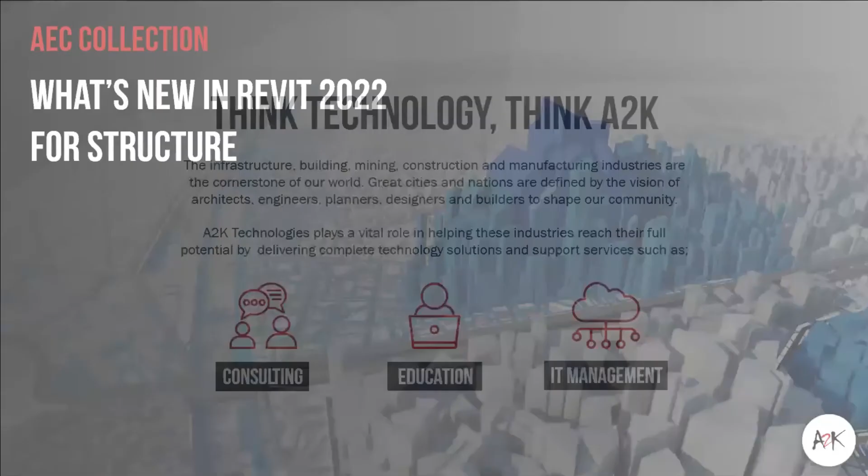Thanks for joining us for today's webinar, Revit Series 3, What's New in Revit 2022 Structure. Technical consultant Ben Burns will be presenting for us today.

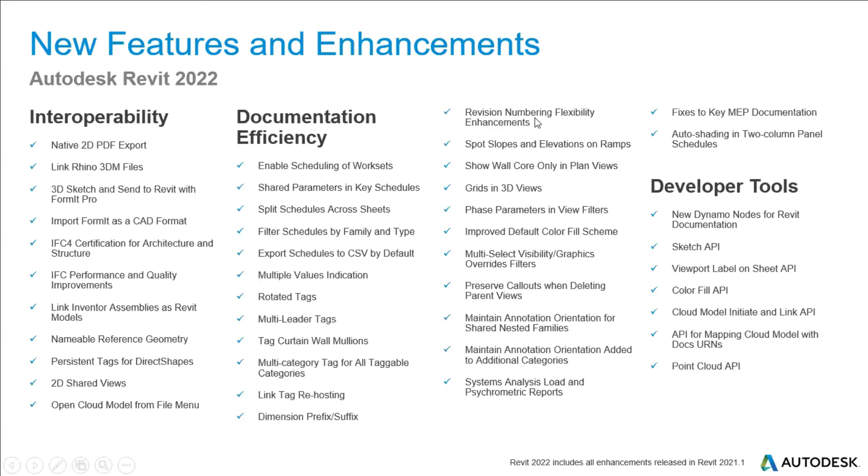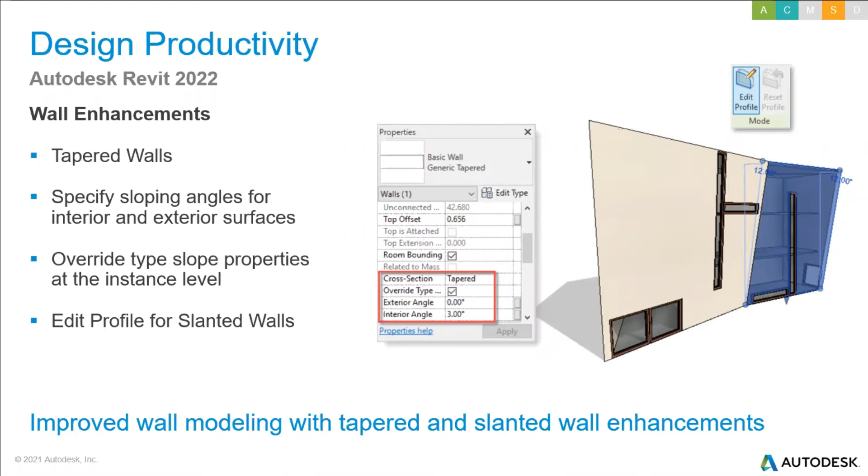So we'll go through some of them in more detail now. Design productivity - we've got wall enhancements. Now we can change any wall to a tapered representation. We can change that cross-section parameter to tapered and update those sloping angles using instance overrides or the wall's temporary dimensions. We can align hosted components to the sloped face of the wall, so windows etc. align to those faces and you get clean joins. You can modify the sketch boundaries of a slanted wall along the work plane, giving greater control over the display of the wall geometry.

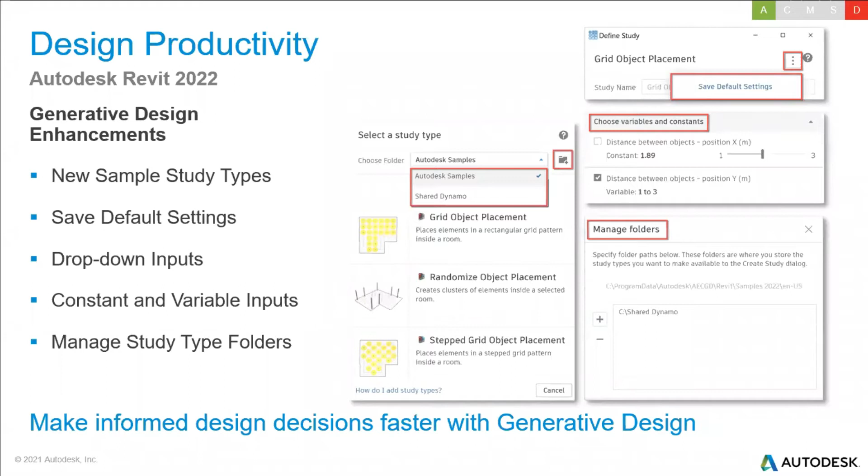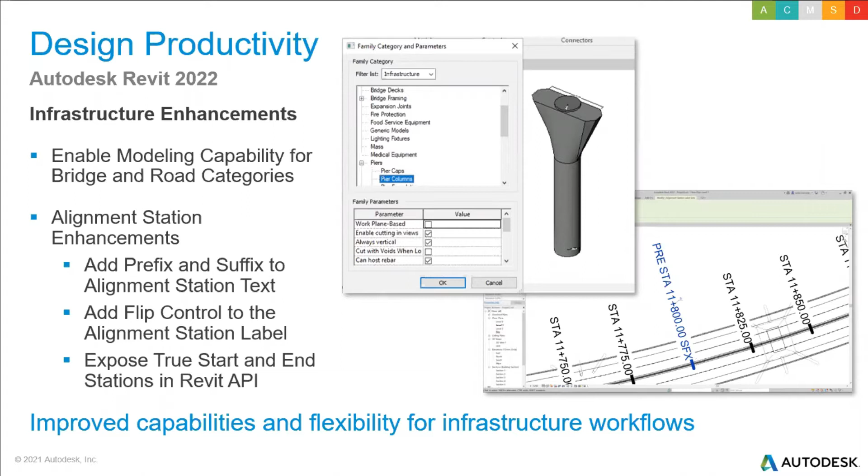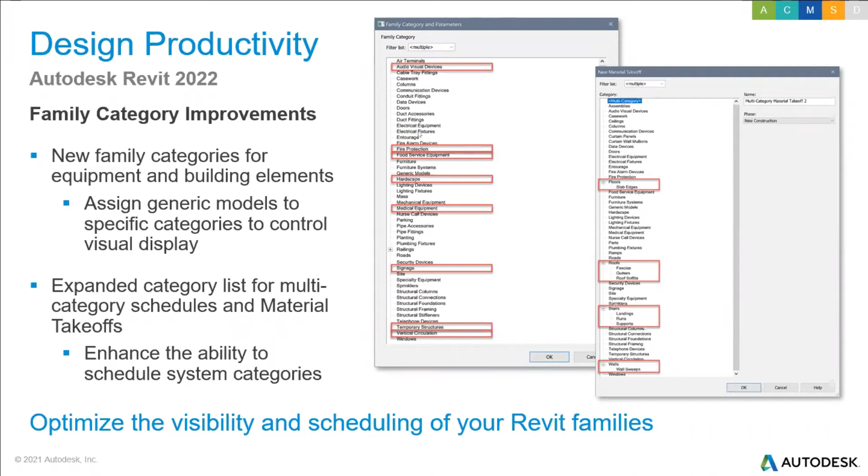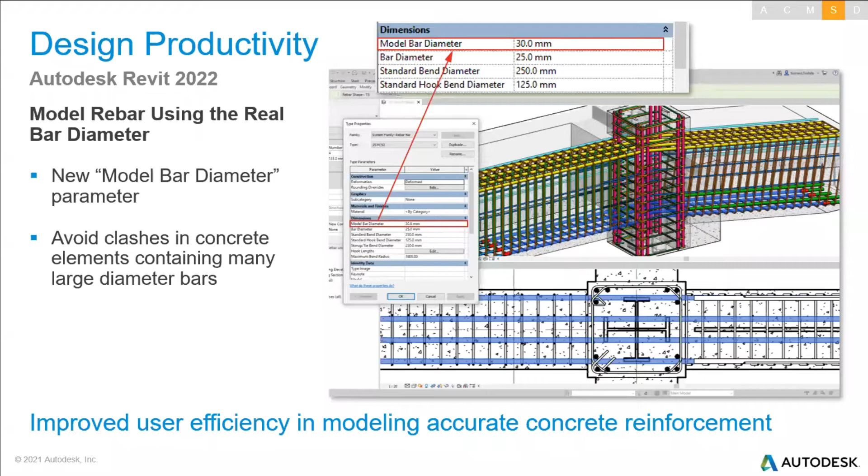Revit 2022 does improve your rebar modeling and detailing. It makes it a lot easier for you to move from those disconnected CAD workflows to BIM, really improving that 3D reinforcement modeling feature. You can now move or remove individual bars in those rebar sets and path and area reinforcement to avoid those clashes with other bars.

So you can displace locally bars and still maintain that logic of the set, like your 200 diameter centers or whatever. There's no need to split a set into multiple sets or remove the path and area systems. It was a bit complex trying to do that before, but now you can edit them at the same time.

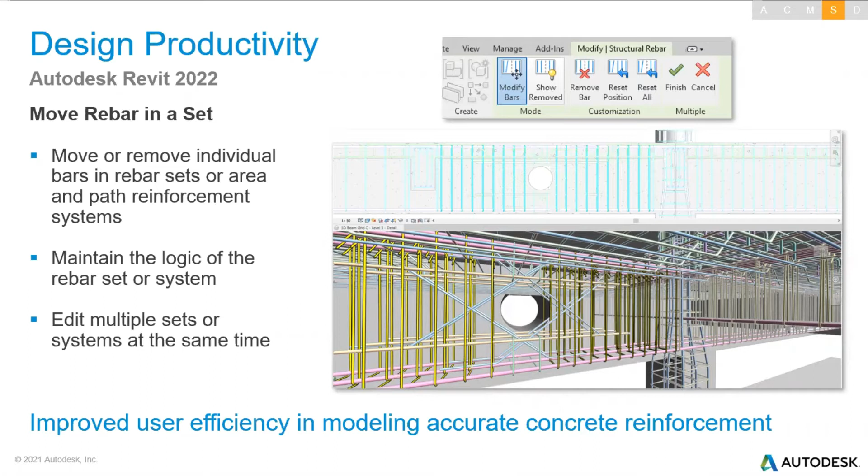This new feature significantly improves your efficiency and productivity in modeling that accurate reinforcement, particularly in both cast in place and precast concrete structures.

You can place rebars of exact dimensions now, aligned to any reference, with just 2 clicks. They've really improved how the reinforcement places. It's a game changer basically for rebar detailing in Revit, making it a lot easier than before. I think a few people always found it a little bit clunky, but now it just works a lot smoother and it's a lot more approachable, especially for people who don't use it a lot.

Yeah, really improves that ease of use and your own productivity in modeling those reinforced concrete details.

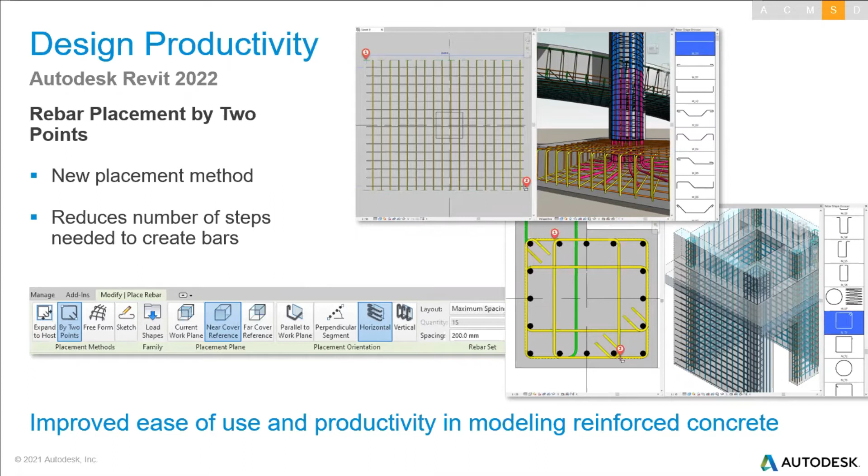You can assign shape codes to custom bent freeform bars, so it provides you better fabrication instructions. You can distinguish between bars to be bent on site versus bars bent in the shop, and manually assign the desired shape code to bars. It just leads to a lot more accurate rebar bending schedules and bending instructions and the like.

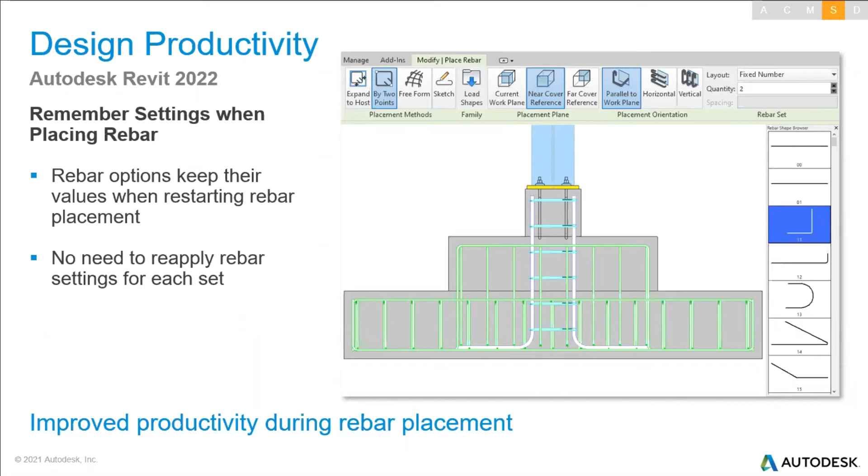Settings used during rebar placement are now maintained for the duration of your Revit session, so there's no need to apply rebar settings for each set. Your layout, placement plane, placement orientation, rebar shape, and rebar type keep their values when restarting rebar placement. This works for both shape-driven and freeform rebar, reducing the time spent having to monitor and manage your rebar settings.

An added bonus for 2022 is the improved performance in 2D views when zooming, panning, and when the regen's happening. These performance improvements are noticeable mainly when displaying rebar in 2D views at a fine detail, particularly with complex drawings on screen. In testing, the regen times dropped from minutes to literally 3 or 4 seconds, so it's got a lot better rebar reinforcement performance than ever before.

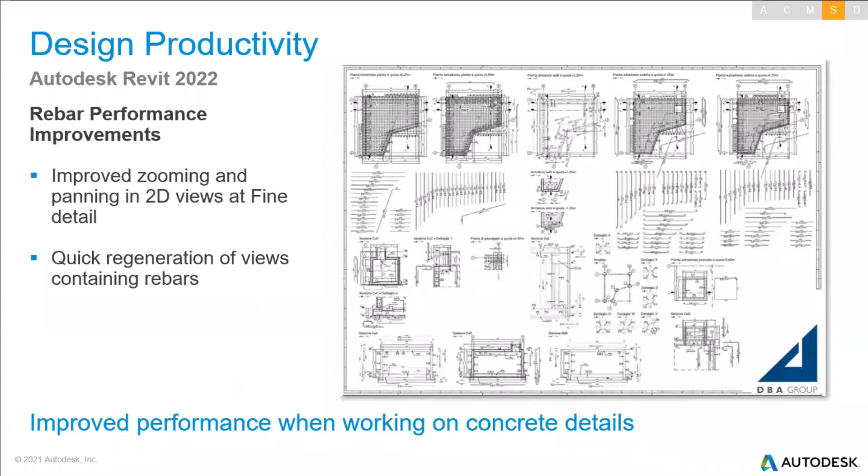In Revit 2022, structural engineers can automate the placement of steel connections, following custom sizing rules, by predefining connection libraries and associating those connection types with profile size ranges applicable to them. The first step is for you to create that library of your steel connections.

In that library, you can add a variety of connection types and specify the ranges where they'll be applicable, based on your own practice or standards like Australian standards. They're intended to help you save time when placing those simple steel connections.

So you can have a certain base plate that you use for any SHS from like 100 to 200 - probably a bad example, but you know, you can have a whole bunch of 200 or 250 UBs. Anything that's a UB within 200 to 280 height, you can use a particular base plate for.

That really enhances things, as you can use that in Dynamo to automate those connections. Once you've configured that library, you can open the project and use Dynamo Player to place those steel connections automatically. Works well for all your connections like single plate connections, end plates, cleats, base plates, column splices, etc. Anything that's typically pre-designed and standardized, you can place faster and more accurately.

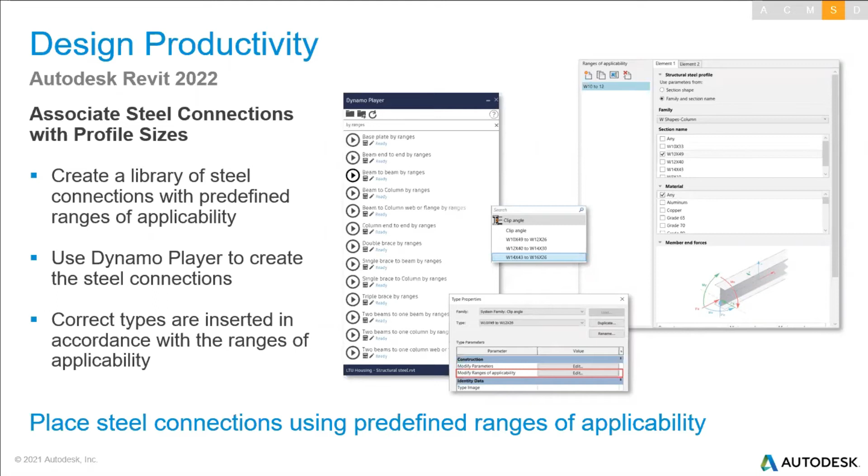Another new feature in Revit 2022 is category list sorting improvement, now consistent with alphabetical sorting order. I think a lot of people who deal with schedules will appreciate the alphabetical ordering for properties, making it a lot easier to sort categories in your schedules and material takeoffs.

In Revit, you can use filters to quickly find available parameters now when creating schedules and working with those. When you create a schedule, the fields tab dialog includes a filter section, so you can filter these parameters based on parameter name, parameter type, discipline, value, type, or instance, and use that as a search tool - as you type the parameter name in the search field, the list is actively filtered.

When filtering a schedule, that filter only affects the available fields, and fields already selected for use are not affected by the filter. You can use that information to help identify the correct parameter to work with, along with tooltips that will show you the parameter name and parameter type.

It also appears in the project parameters dialog. So it really enables you to easily filter those types and characteristics, save you a bit of time, and help you manage them more accurately and efficiently.

The Load Autodesk Family opens a dialog that displays the default content provided by Autodesk. Some people have been using third-party products for this. There are a few that people know of, but I won't name them.

This content's now cloud-based. It used to be a technology preview - I think it was available a bit in 2021, but only as a preview. Now it's fully functional, so you can have your sequential searches, back, forward, home buttons, and navigate through all that content.

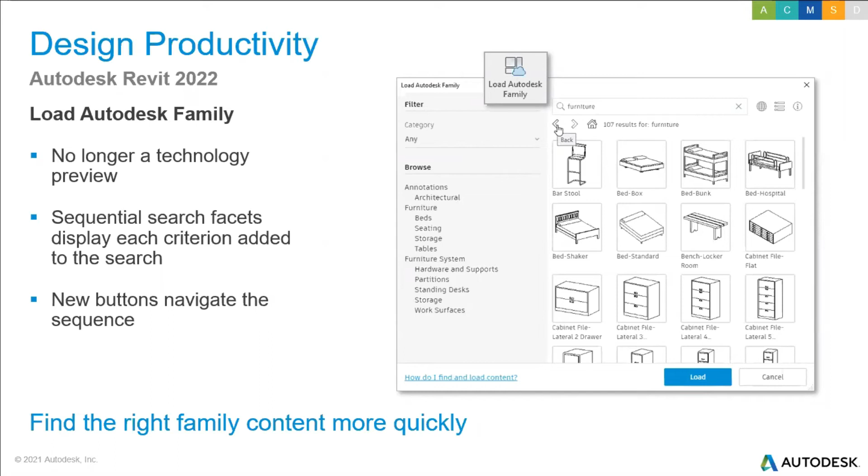In Revit 2022, settings in all modify tools are now remembered across your sessions for mirror, align, offset, scale, rotate, etc. The material browser will also remember the last used tab.

Your performance in loading cloud projects has also been improved by like 30 to 40%.

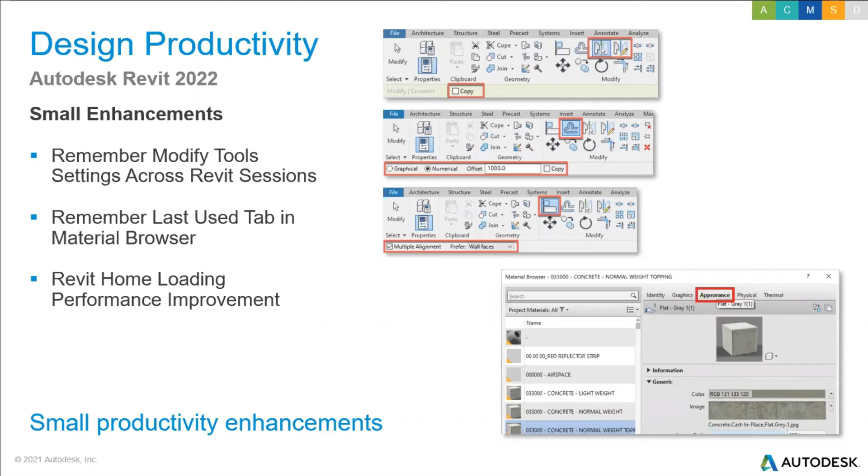In Revit 2022, many dialog boxes that were formerly fixed in size can now be resized. I know that's something a lot of people have been screaming for, so it makes it a lot easier to work with those long lists.

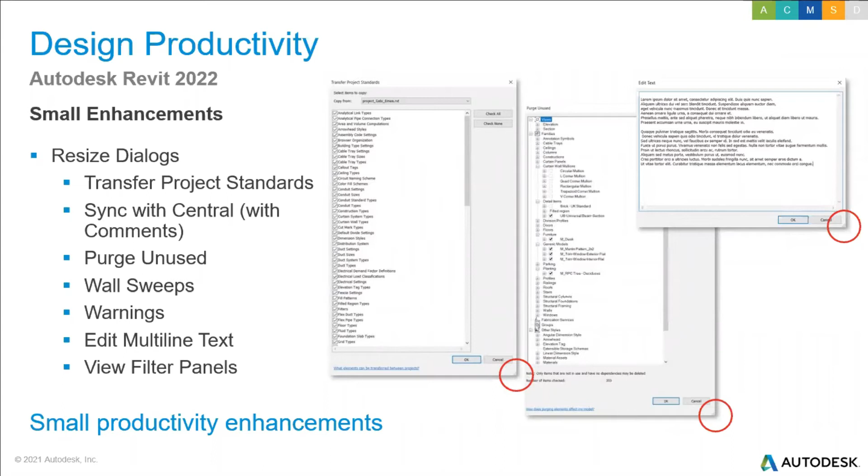Now we're going to talk about some interoperability features. For those interested, we're about halfway through the slideshow.

Revit 2022 includes its own PDF export. A lot of people I know use third-party ones, but this is an inbuilt native 2D PDF export. It's very similar to the print dialog, such as your ability to export the visible portion of a view or your user-defined selection of sheets.

PDF naming rules you can really set up within the export setup. Even with some of those third-party softwares, it pretty much just gives you the name of the file, whereas this you can really customize a bit - if you want to get the name in, the number, maybe put a prefix in as well, you can do that.

You can detect an automatic size, or select it from a multitude of sheets. Just makes it a lot more familiar to people, and it's also a lot easier to configure those features to really get out that content well.

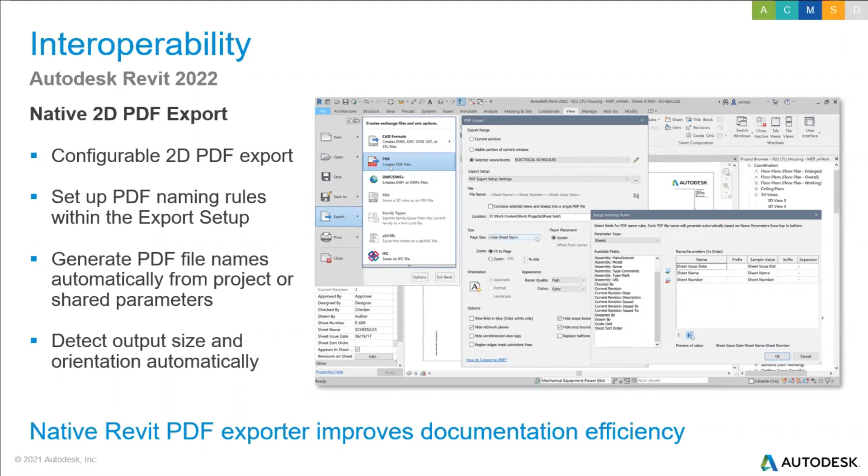Revit 2022 enables the linking of files from Rhinoceros. Changes in the Rhino file are immediately updated in Revit by reloading the link, so it acts like a live link - you will need to reload, but you do get that link through there. Host and link to your conceptual Rhino file in Autodesk Docs and ensure everyone's got access to that latest information.

Achieved IFC 4 reference view certification. IFC property set definitions and the like have been updated to the latest versions, significantly improving the performance of linking in some IFC files containing elements with large amounts of parameters. Added the ability for IFC exporter to pick up information from your site location, so geo coordinate referencing etc., as required by IFC. Autodesk is the first software vendor to support IFC 4 exports for both architecture and structure.

That has been an issue. I have had it with a couple of large architects trying to export to IFC 4, where now in 2022 it does have a better tie-in.

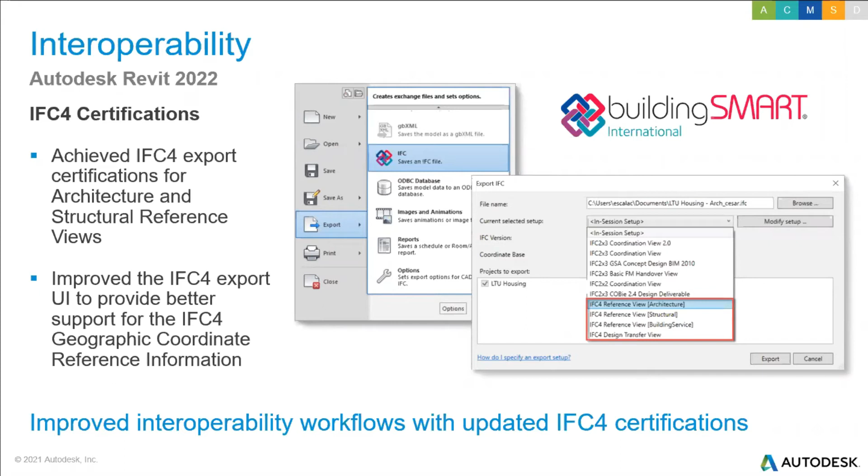Maintain links between your Revit and Inventor data for seamless BIM interoperability. You can link your Revit models exported from Inventor, and it has the new simplify command to basically produce a Revit model containing only the components and features needed for your design.

You can link those resulting Revit files into Revit projects, and link Revit back into Inventor, so the Inventor user references the Revit project - keeping that building design intent model synchronized with that manufacturing data.

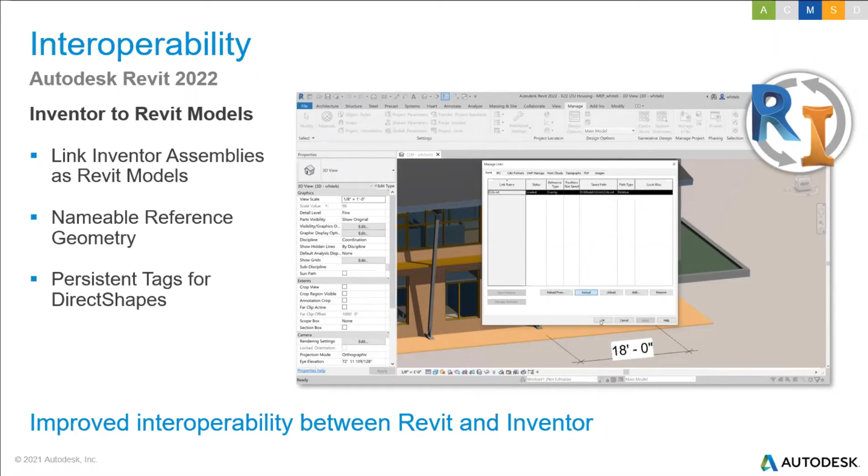It allows mechanical engineering tasks to be performed in the context of that building model, and when the manufacturing models are repositioned and sized correctly, it'll link through as native Revit data. So it's a big improvement in that interoperability between Revit and Inventor.

Revit 2021 introduced the shared views feature for 3D views. In Revit 2022, this feature has been enhanced to also include 2D views and sheets. So this means you now have the ability to share 2D and 3D views and even sheets of your Revit model with your project stakeholders who don't have access to the software.

From the Collaborate tab on the ribbon, you can select shared views to launch your shared view palette. When you're ready to share your content, just press the new shared view button, name the view, and press the share button, and you can then share that link with project stakeholders.

They'll have the ability to review, comment and mark up the shared 2D sheet using your Autodesk viewer on their web browser. Back in Revit, you can click the refresh button in the shared view palette at any time to review the latest comments and other information.

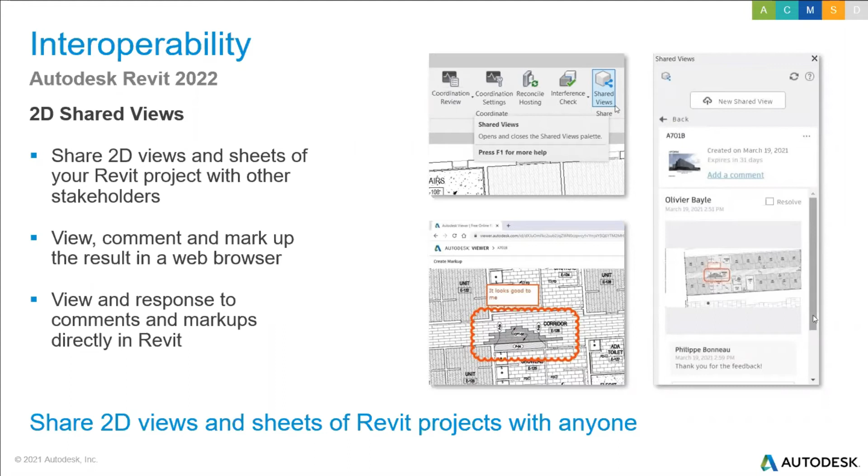So it really sort of helps with that paperless office, if anyone's in offices these days.

You can open the cloud model from the file menu. So in Revit 2022, when you navigate to file open, you can find a cloud model button to open that Revit cloud model, which provides another way to access those cloud-based models in addition to the home page.

Saving a Revit project as a cloud model and initiating a cloud work sharing display uses a similar user interface, which provides you with a better user experience.

And on the homepage as well, the button BIM 360, available in previous Revit releases, has now been replaced with a button Autodesk Docs to access projects stored on that platform.

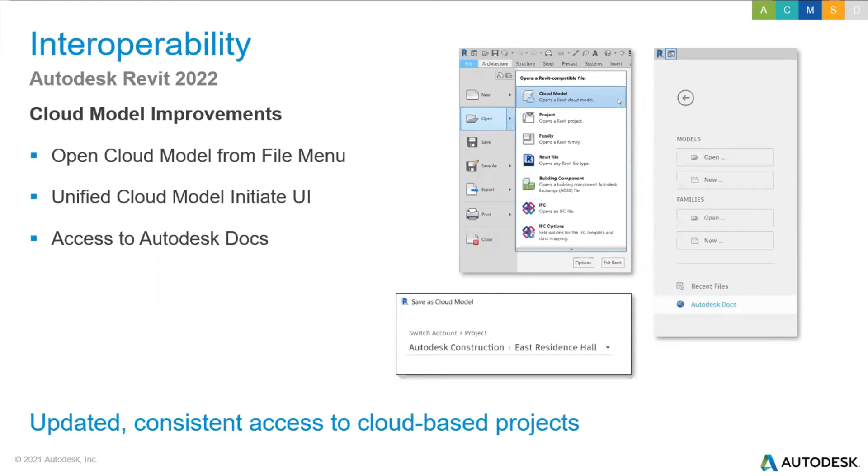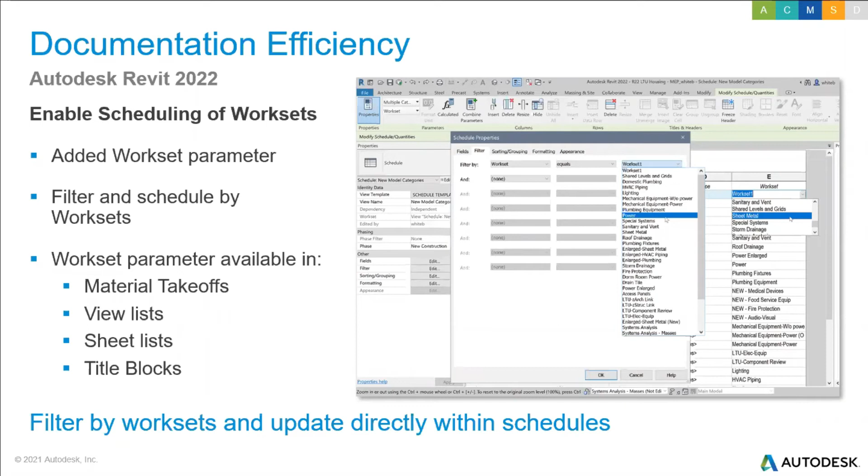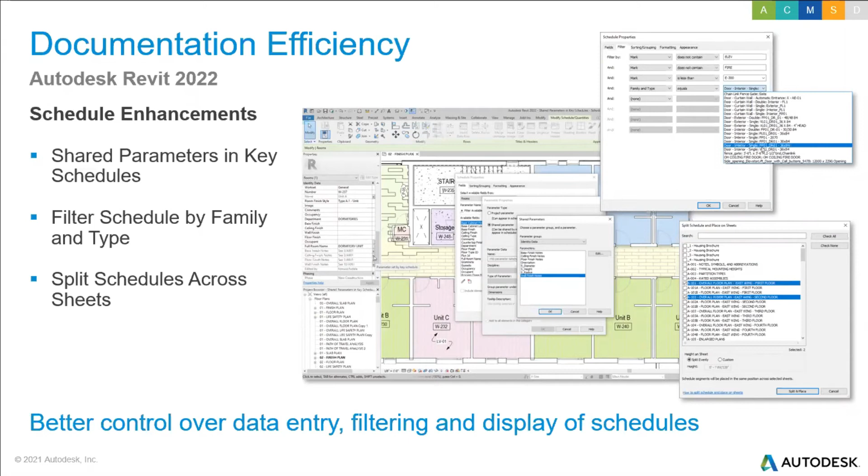Revit now supports the ability to export schedules as CSV files as well. So if you do add a schedule to a sheet, you can export it as a CSV format. When exporting a schedule, you can send the data to a CSV and get it out to Excel, where you can open and manipulate it.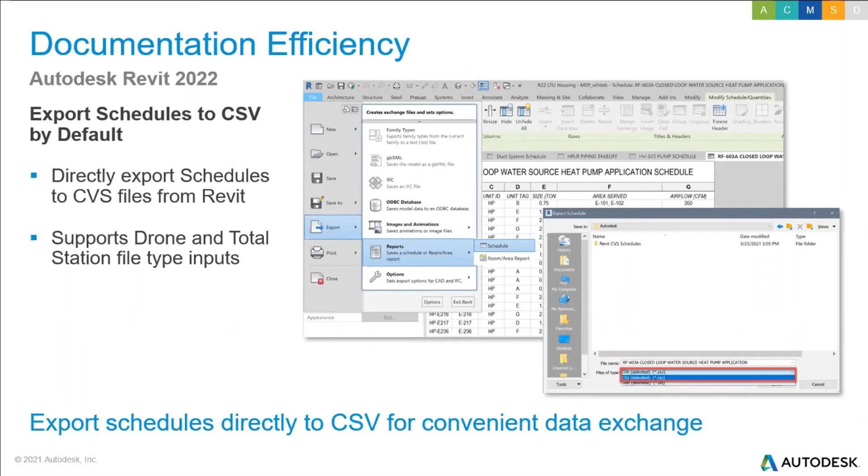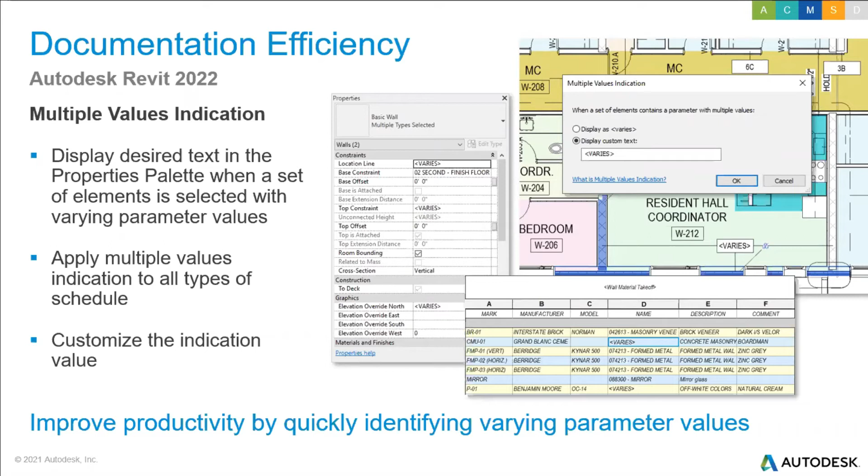Rotating tags. So when you rotate a tag in Revit, you might like to control that angle precisely. So you can now set in a new angle parameter for tags. It's found in the properties palette, and it makes it easier to control that displayed angle of that rotated tag. So if you rotate the tag with the rotate command, the angle value is automatically calculated, but you can enter a specific value. So it makes it easy to apply tags in your views, giving you a better control over it.

And if you have that, you can also have multi-leader tags. So if a view in your project contains similar elements, you may prefer that they share a tag. So you can apply a single tag to multiple elements and even indicate that total quantity if you desire. So once you place that tag in the model, you can add or remove leaders to similar host elements at any time. And you can just select the tag, and using the add and remove host option, you can add additional hosts.

Wall mullion tags. So a new category has been added for curtain wall mullions. So you can choose to load the tag for curtain wall mullions or create your own tag for that category. So these tag enhancements really add that flexibility and will help you create more readable and efficient annotations when documenting.

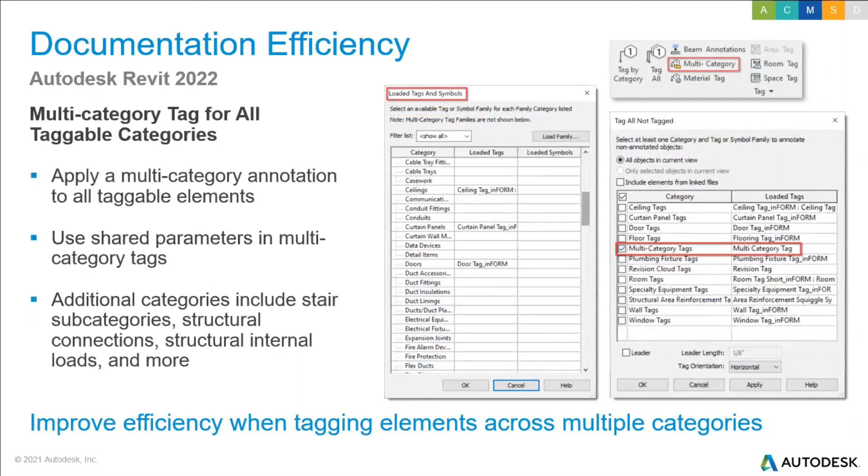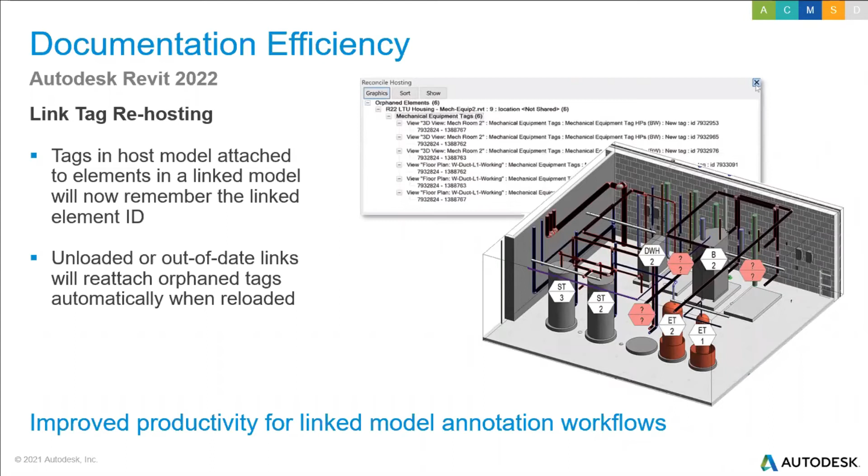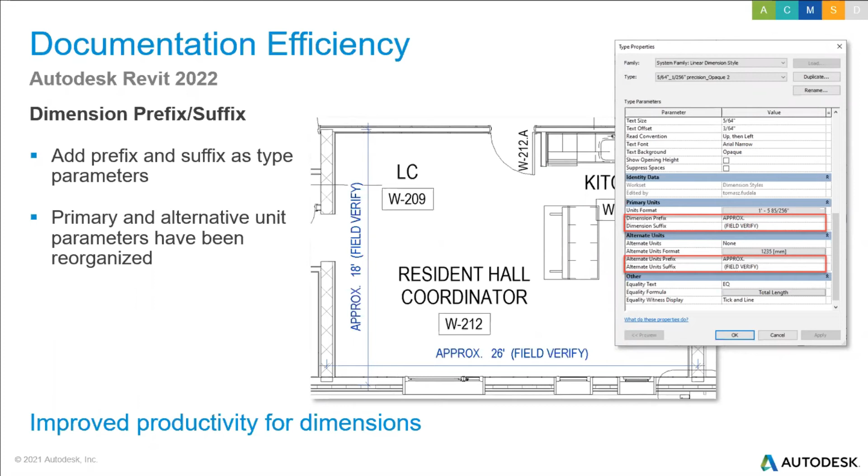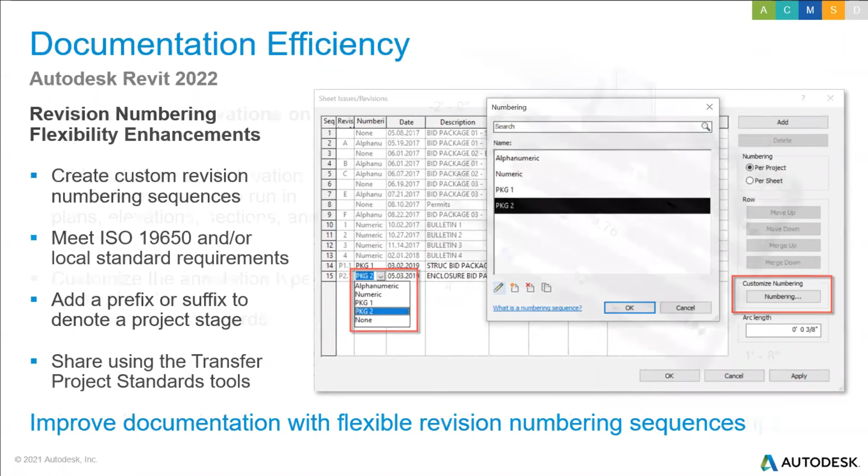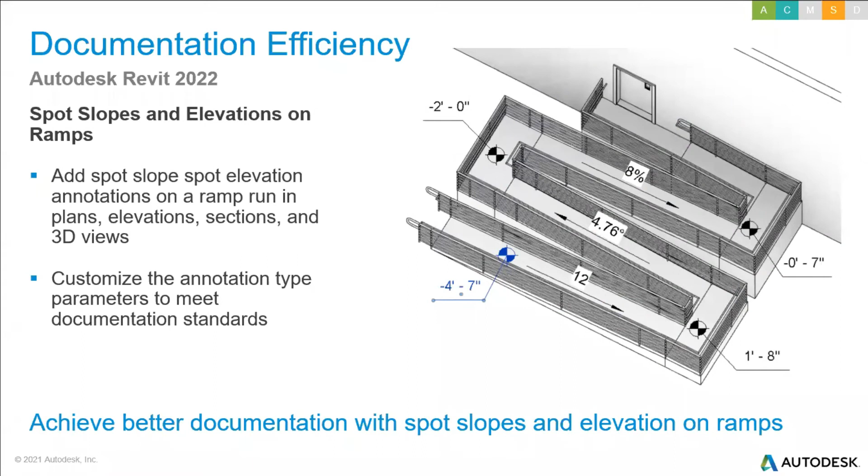In past releases, it was time consuming to hide the non-core wall layers. So you can hide or turn off the layers of core walls. So you've got now a parameter to help you display only those wall core layers. So it's in the visibility graphics dialog box. You can deselect the new non-core layers and it'll display a simplified version of those walls. So probably more of an architectural feature, but occasionally we do need to show those core walls, etc. So wall layers located between those core boundaries will remain visible. Makes it a lot easier to read plans in Revit.

In Revit 2022, you can choose to display grid lines in your 3D views. You can go to the Show Grids parameter in the Properties palette to access a list of levels that you want to select the grid lines to display for. When you hover over a grid, it'll highlight as a planar surface. If you select the grid, the controls will appear and its properties will display in the Properties palette.

In the 3D view, you can treat grids in many of the same ways as you do in a 2D view. So you can hide grids, you can display grids by halftone, you can copy, paste, or delete grids from the model. You can snap to grids when placing other elements. You can also change those grid instance and type properties.

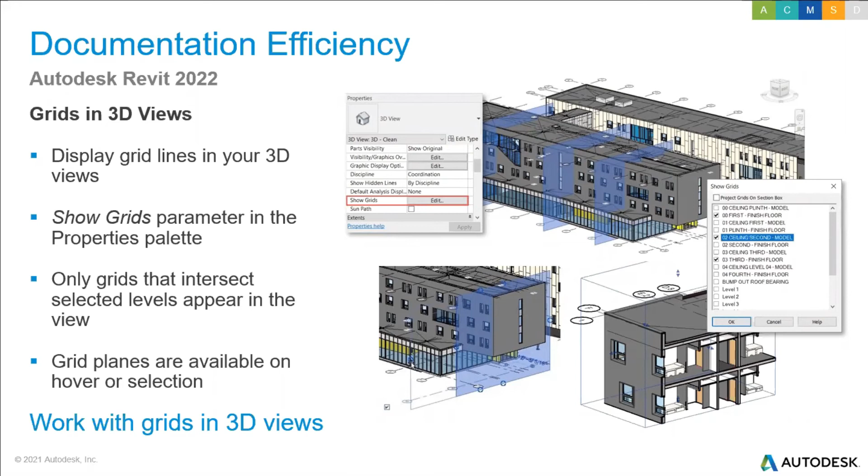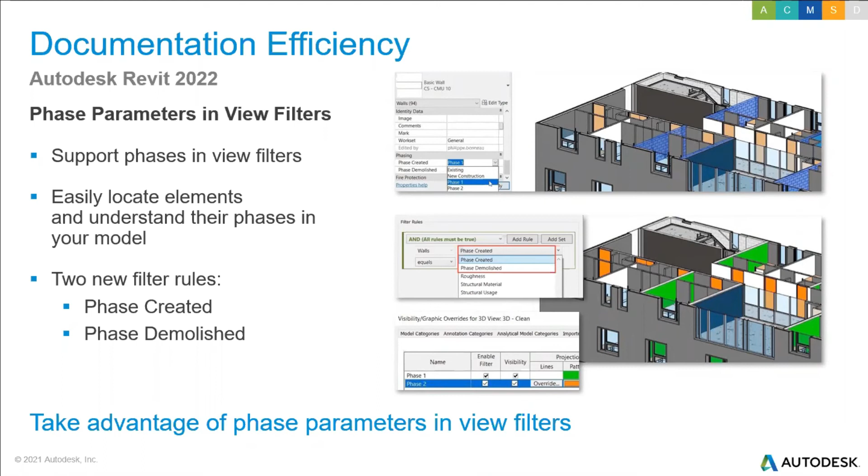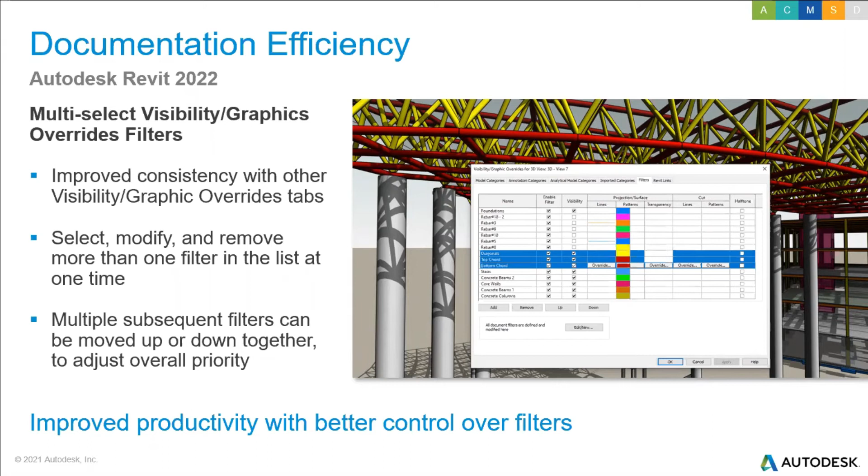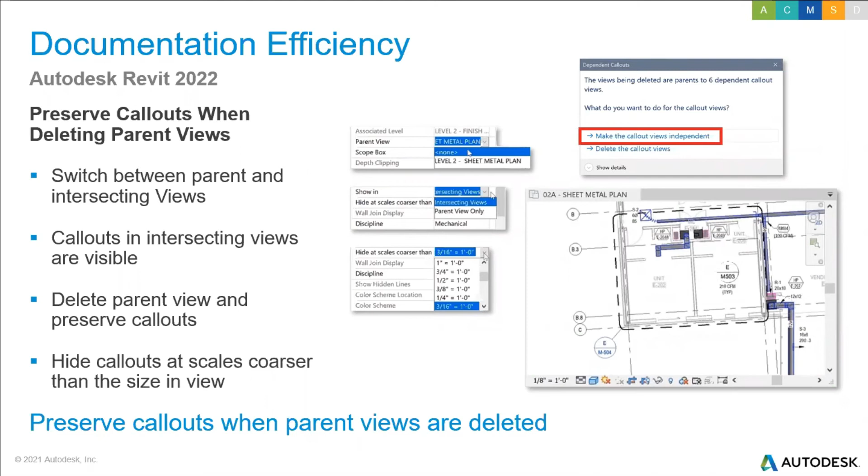Dependent callout views are preserved when the parent view is deleted. You are asked if you would like to make the callout view independent or delete the callout view. More categories can now be shown with an annotation symbol using the maintain annotation orientation family parameter. With this improvement, maintain annotation orientation has been added to the following categories: generic models, mechanical equipment, specialty equipment.

There are some developer tools, so we'll just touch on some of the Dynamo improvements. We've only got a couple of slides to go. In Revit 2022, 67 new Dynamo Revit nodes have been added to support the most commonly requested conditions for annotations, sheets, and views to automate those documentation tasks for higher efficiency. It also includes Dynamo for Revit 2.10. These nodes will help you work a lot more productively on your documentation through Dynamo.

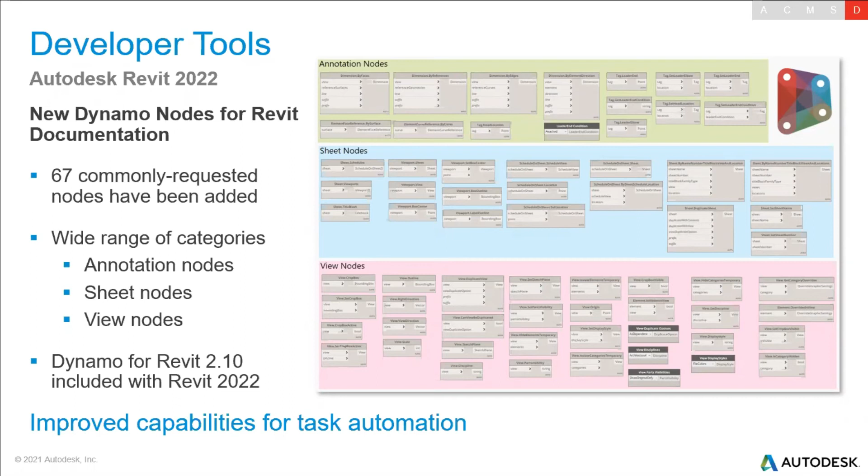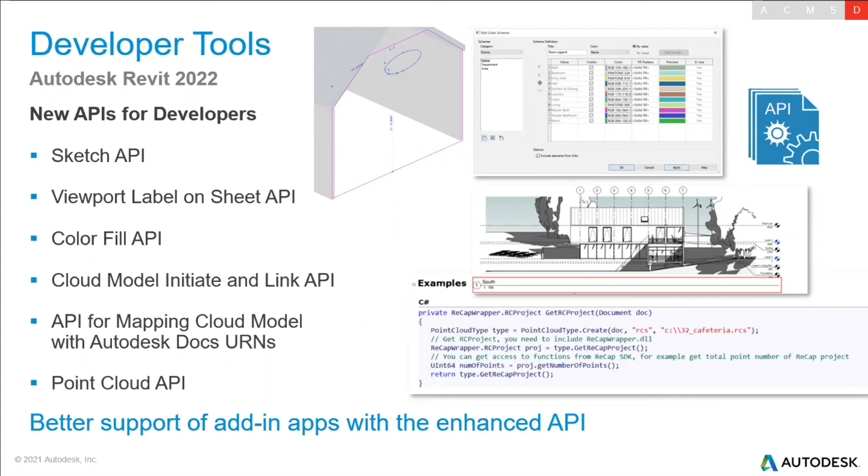Revit 2022 provides better support for add-ins with the enhanced Revit API. You can now read and modify sketches from Revit elements via the API. You can control the two-dimensional label offset through the bottom corner, and you can also control the length of the viewport label line in sheet space. And you can access the ReCap API using the improved point cloud Revit API. So it really gives you developers more new possibilities when building those Revit add-ins.

I'm now just going to go on to a bit of a live demonstration, so I'm just going to show you some of those features. I'm going to bring up the sample project here in 2022. I will try and say it right by the end of the demonstration. So that cloud content, first of all, is under insert, and you can go to load Autodesk family through the cloud content here. It has come up on my other screen. I will drag it back.

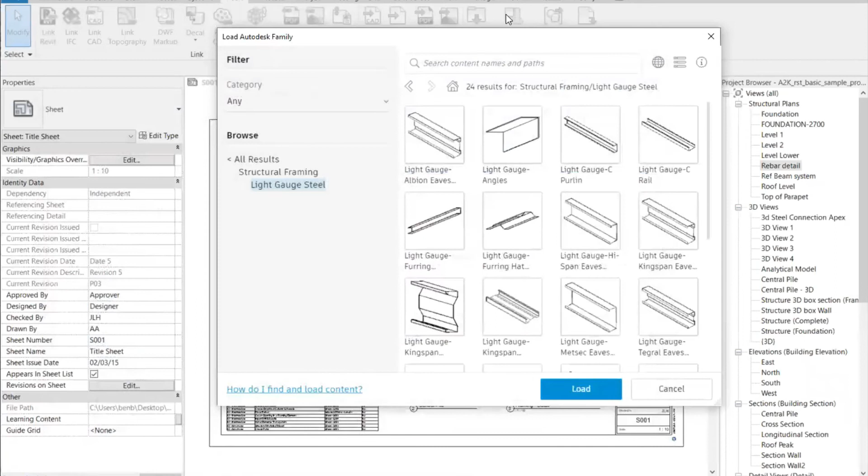So you can browse, go through all your results. You can load content. I know I did have someone asking, can you path local content? You can find and load content as well, but this is generally only really set up for the cloud content. So you generally use the normal load family. This is really specific to the cloud, the Autodesk content. And you can go through and find your annotations.

I'll just go to structural framing, something we all know and love. We've got our structural framing. Probably won't go anything too crazy. We've got our light gauge steel, and you can grab your light gauge Zs, if you wanted to, like light gauge Z purlins, and load that in. Again, it's come up on my other screen. So you basically got your Z purlins through here.

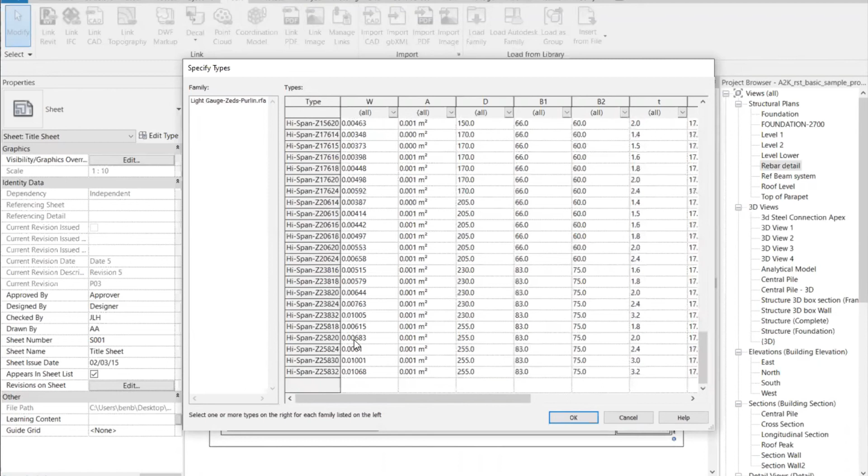Also want to show the tapered walls. So I'm just going to go to my 3D view. I've got some tapered walls I just did here. So they're reasonably easy to set up, and you can see how you'd use them like for a retaining wall or the like.

Oops. No, I think the sound, someone's just saying, have you lost sound? I believe everyone can still hear me. It all looks okay on my end. Please let me know if you can't hear me, please.

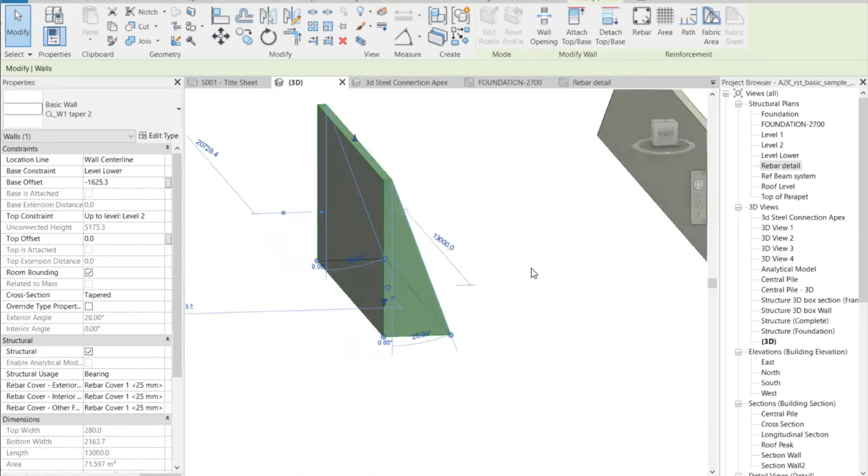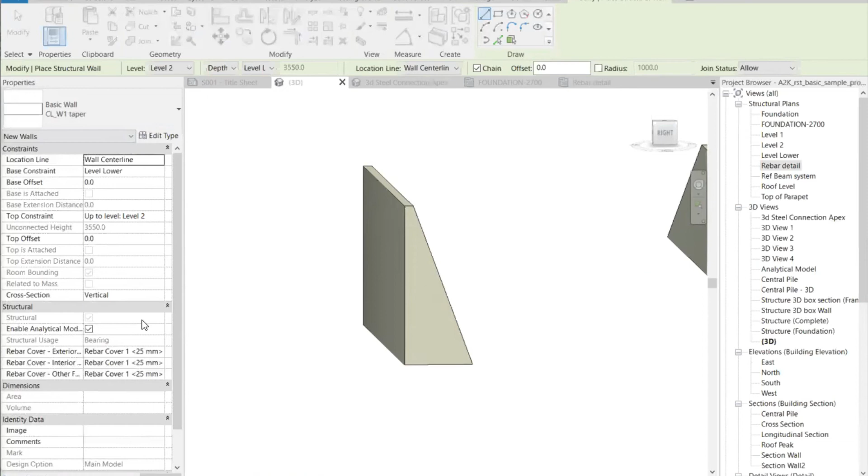So these tapered walls are quite easy to set up. You can set it up with a taper on both ends or a taper on the internal or external side as well. So if you do go through to do a new wall, just structure and wall, you'll see I have set one up with a taper, but to set a new one up is quite easy. And again, they're all coming up on my second screen, apologies. I'll just get rid of the preview.

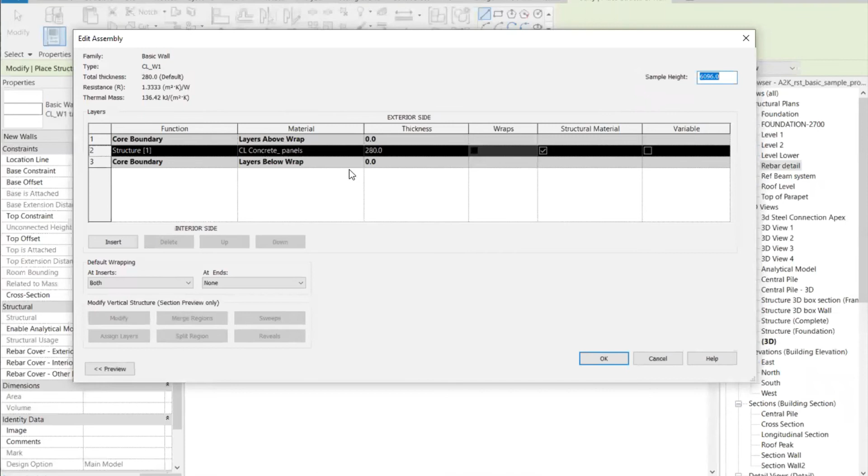I'll actually use a wall that sort of doesn't have a taper. So this is one here. And we can then go into edit the structure. And this almost works the same as like a slab where you're trying to do a variable. You can add in the variable here to the structure of that wall. You could do it for different cores, etc. And hit OK. Once I do that, you'll now see that I get these cross-section properties.

So I can change that angle and change where the width is measured. I can change that at the top or at the bottom. And I can change those angles. So I might just put in like a 20-degree wall. One thing I should have done: remember to always duplicate first before you change the settings. Do what I say, not what I do. Always duplicate first, and then you can change the settings.

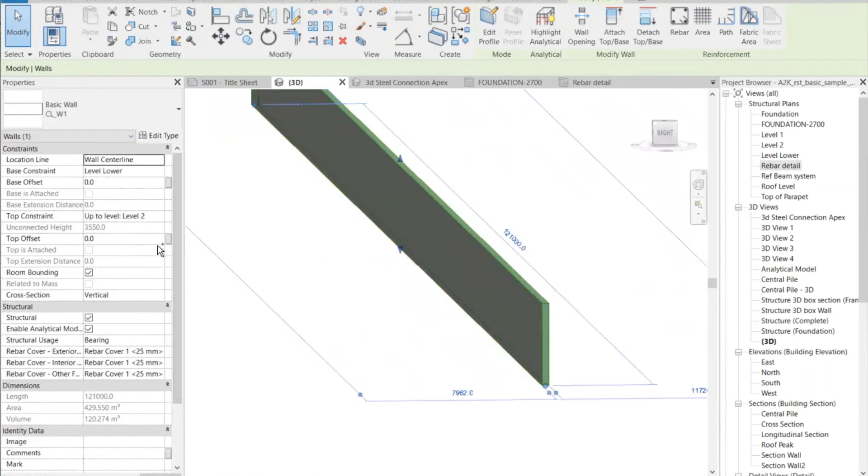And OK. And now when I go to draw that wall in, and I'll just draw it along here, you can see at the moment it doesn't have that taper. It is just a normal straight wall. But what I need to do is to go into the instance properties, and then that cross section, I can change to a tapered wall. It will say that I need to disable the analytical model. So I can just disable that analytical model and I'll get my tapered wall.

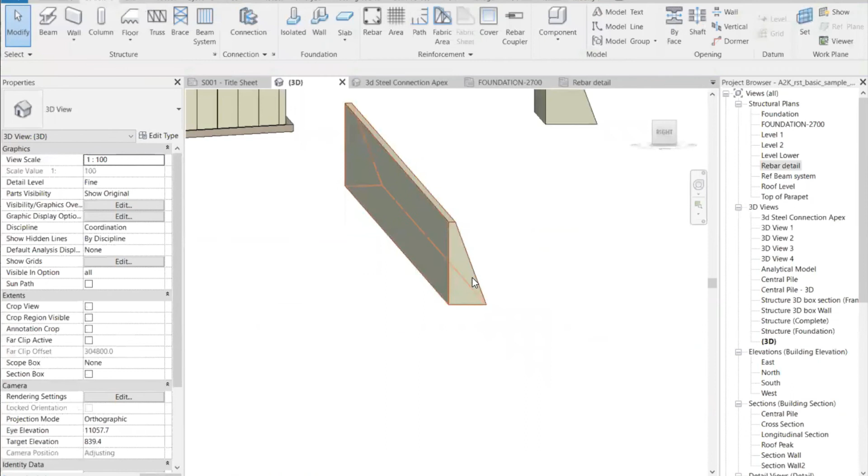And obviously I can flip the wall or do whatever I need to do. Or if I had a thickened base, I could put another wall on top of that and join them. So that's the new tapered wall feature, which is quite good.

Reinforcement I'll show as well. So I've got a little rebar detail here. This is just a little footing. So I just want to put some bars, maybe put a cage through that. Yeah, I know that we'd normally put a vertical cage. I'm just going to put a horizontal one. So I can go under my structure tab and hit my rebar. And you can see now I can again use my placement to place on near cover, etc.

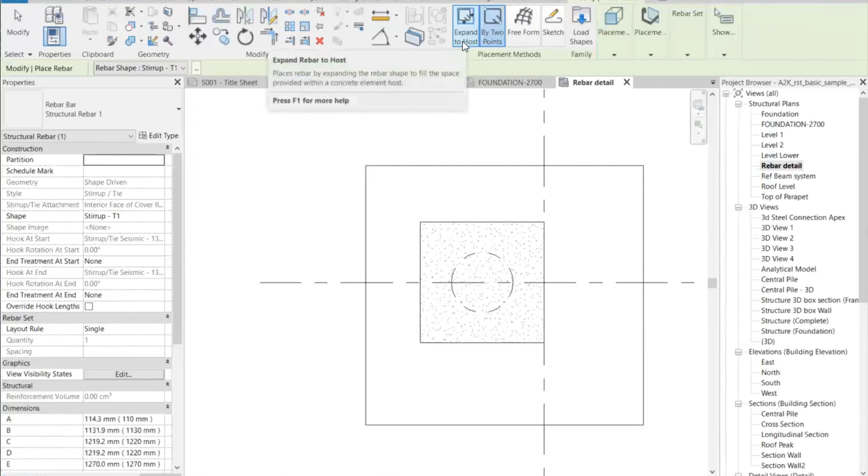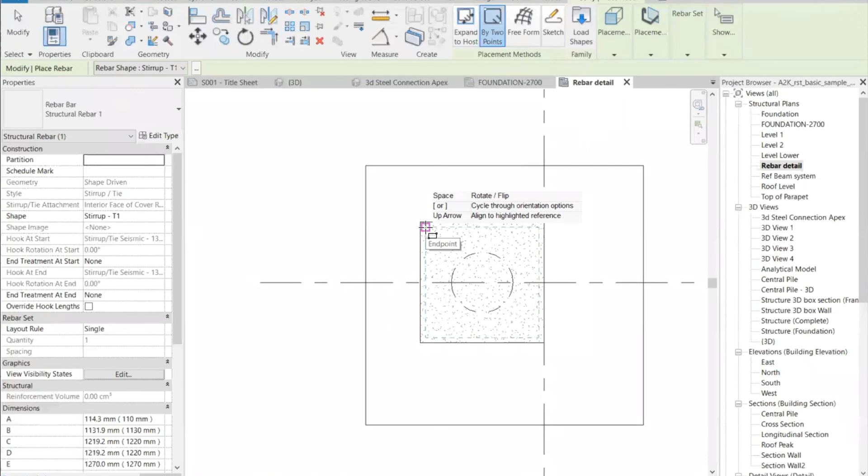Oops, I didn't mean to jump to the other screen. You can now use by 2 points. You'll see as well, you get a little helpful tooltip come up. Now, I don't love this, but it does make it a lot more approachable to other people. So you can use your up arrow to align to the highlighted reference, or use your space to rotate and flip, which we all know, but it can be a lot easier for people who aren't used to using it.

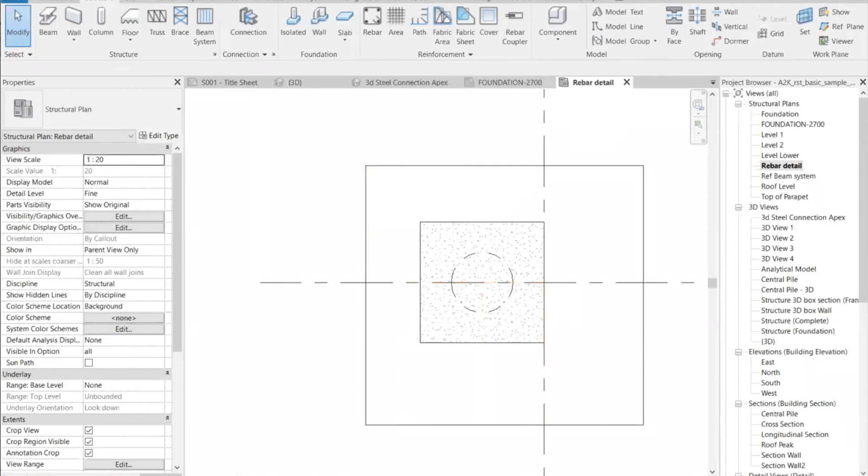And I can put that bar in. And yep, I probably need to turn my reinforcement on, which I haven't, so I can't really see it. Please bear with me. Structural reinforcement. And I probably don't have it on fine level of detail. Yep, and when I put it in, I may have only put 1 bar. So if I did have a fixed number by 2 points, it would work a little bit better. There we go.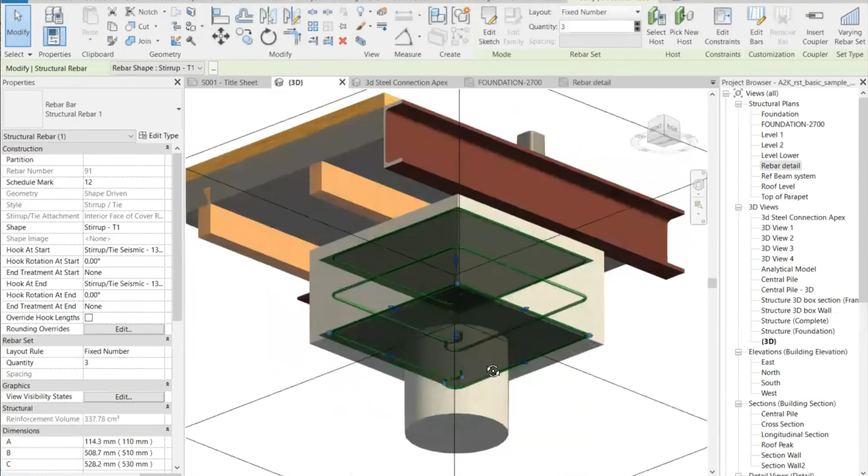So yep, then that's our 3D bar. If I made it visible in this view, so it's my 3D, you can see my bars there. So it just makes it a lot more approachable, especially for people who don't do a lot of reinforcement. It's just a lot easier to use than it was before.

Just going to show the revisions as well. So if I go to manage and my additional settings and go to revisions. Now I have prepared some before. So you can see where before you just used to have alphanumeric or numeric, you can now customize that numbering. You've got your alphanumeric. I've done a prelim here as well, like for ISO 19650. We can create a new one.

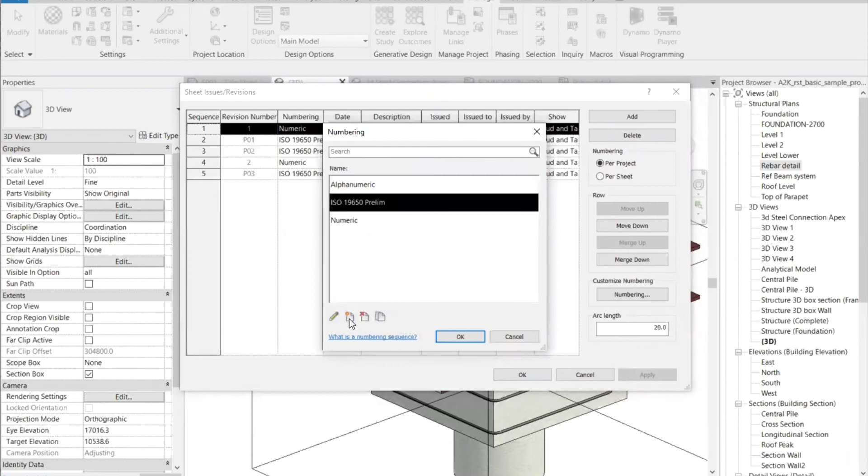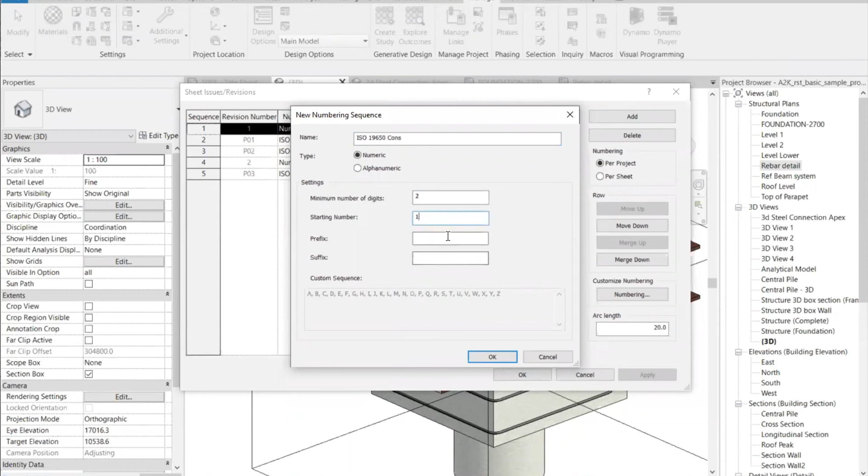We could call this ISO construction. So this is set up for our ISO 19650 and just a construction one. And I can put that I want a minimum number of 3 digits or 2 digits, started at 1 and have a C for construction prefix, and OK, and OK. And now you can see if I add a new one, I can change that to that new construction numbering sequence and I'll get C01.

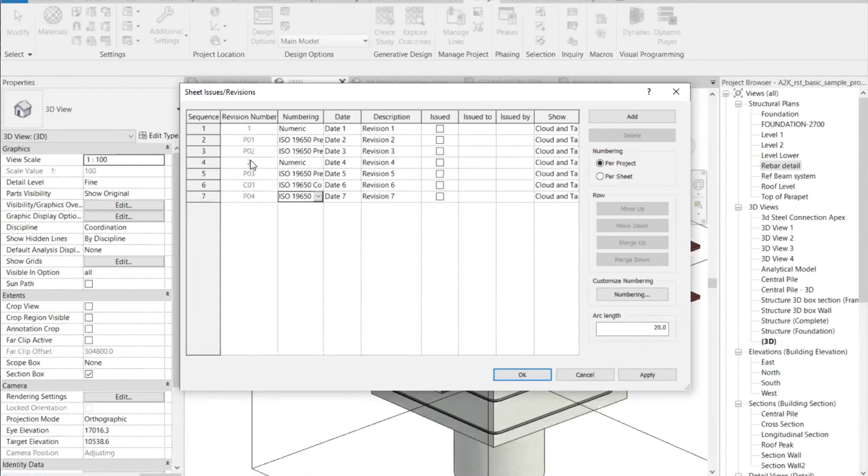And if I add another one, and even if I go back to my preliminary setting, you will see how it's retaining that same number for that sequence. So I've got preliminary 1, 2, 3, and 4. It's probably advisable to have preliminary before construction, but see how you can retain that sequencing of numbering through there.

So if I go back to my title sheet where you can see a few of those settings on, I do only have revision 1, 2 just in here. I don't really have dates or whatever, but you can see how I can tick these on and it will retain that numbering sequence even though you've changed. So you can have that, and that complies with your ISO 19650.

We've also got the PDF export. So if I go under File and Export, you'll see that we've got our PDF straight from here. And you'll notice that this dialog is very similar to the normal print dialog. So we can print our current window or a selected number of sheets, select whatever set we wanted to, or edit that set, filter this, etc.

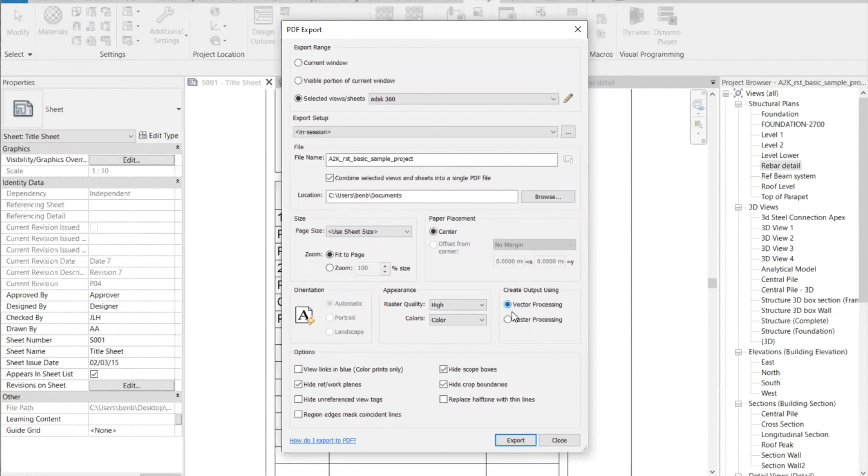And then you get a file name through here. You can put your sheet size, or it'll use the sheet size. Do it as vector, etc. You can change that numbering, like we're saying. So we could go in through.

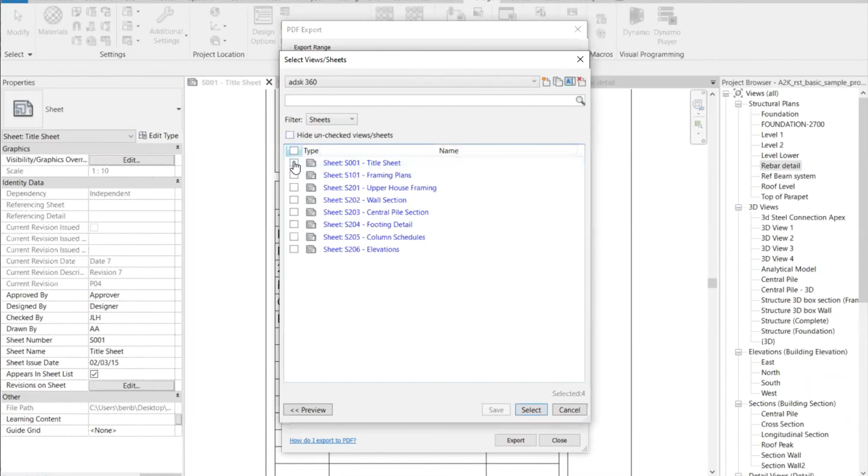I'm only selecting one sheet, so I could just make sure I'm getting my sheets, and just grab all those sheets. Which I could probably do by right-clicking, but yeah, and just select them. And then you can change how you're numbering them as well. So you can browse and put them in and export.

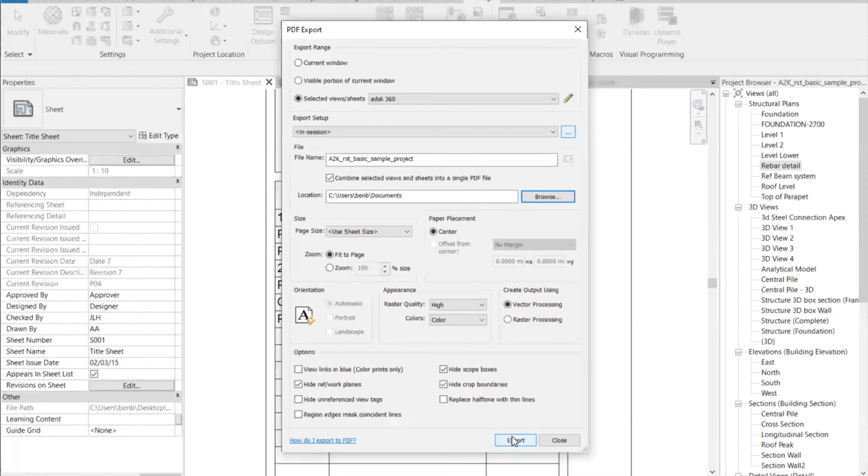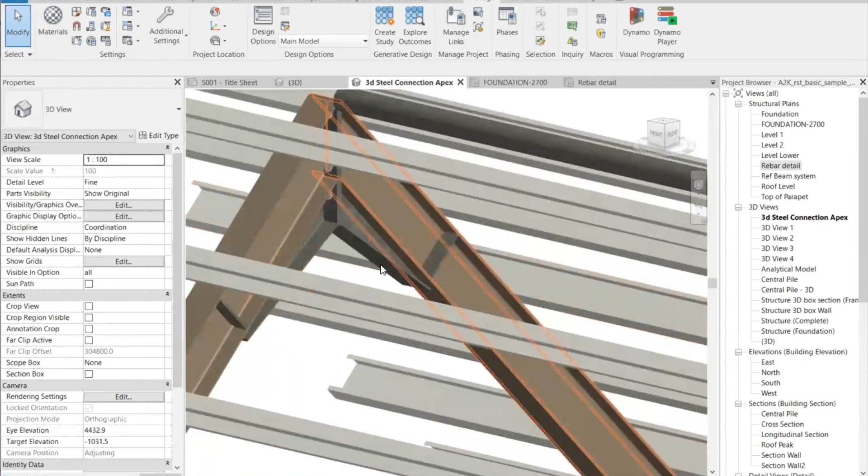We've also got our structural connections. It's still very usable in here, but through Dynamo it really becomes a great feature. So you can see I've got my normal, I'll just deselect my section box and unlock that view. So you can see how I've got a bit of an apex haunch up here.

Now again, you do need to load these connections in, but if I now go under edit type, you can see how I've got a new one here, which is modify my range of applicability. So I can come into that and create a new one. I don't have any set up, but I can create a new one. And once I create a new one, it will then ask me, do I want to use the parameters from the section shape? And yes, and I can put in minimum values, etc.

So I can have that, I want it as an I-beam, and then have a minimum width in here of like 100 and maybe a maximum of like 200. And then I can make that apply to any one where that section shape has a parallel flange and it's got those settings. And that way in Dynamo it can recognize the two beams and then apply that connection that you want.

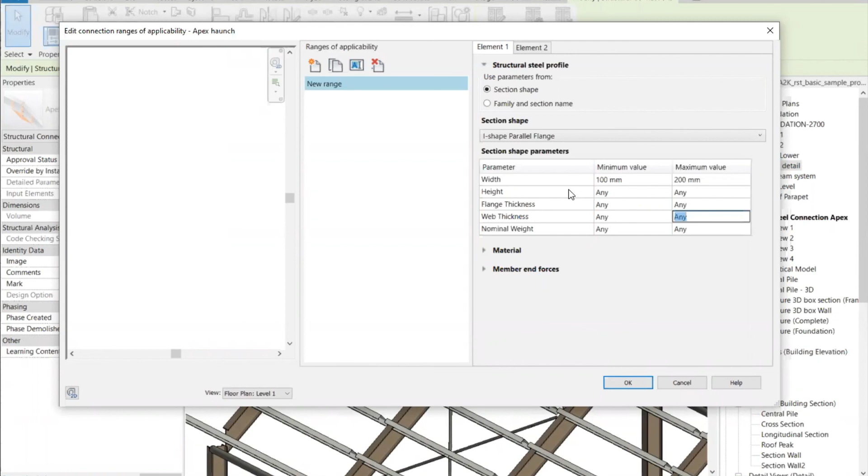And that's about it that I was going to show as a live demo. I will open up to some questions now.

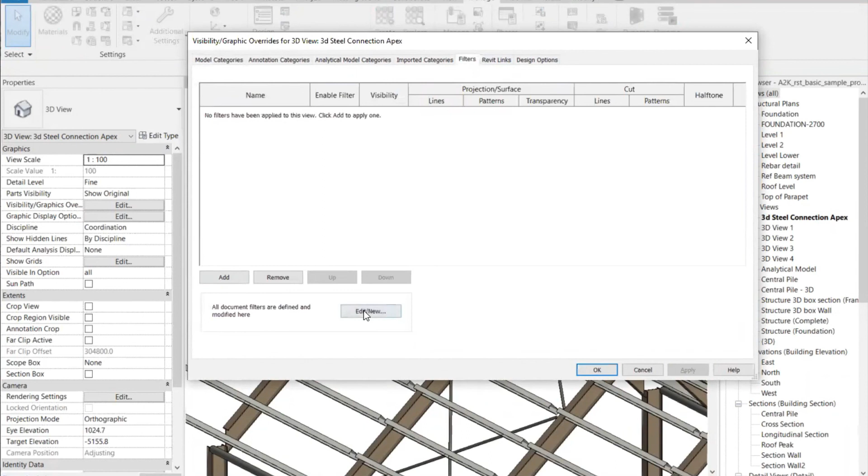Like I said, in your visibility, we do have those filters now available through here. So you'll see that we've got the phase filters, under phasing. I probably won't find it straight off. But yeah, so in our filters, we can create a new filter and you'll see we can have phases in here.

So I can have a new filter and define that filter. I'll just put it in as filter 1. And you can actually have the phase in here. So I can have, say, all my structural framing.

And then I can actually get to do that by phase. So I can have phase created, and then have that equals, and I could even have that was created. I only have the existing construction in there, but if I did create a new phase, like a new one, and add one in here, maybe call it 1980 or something. I can now use that to filter.

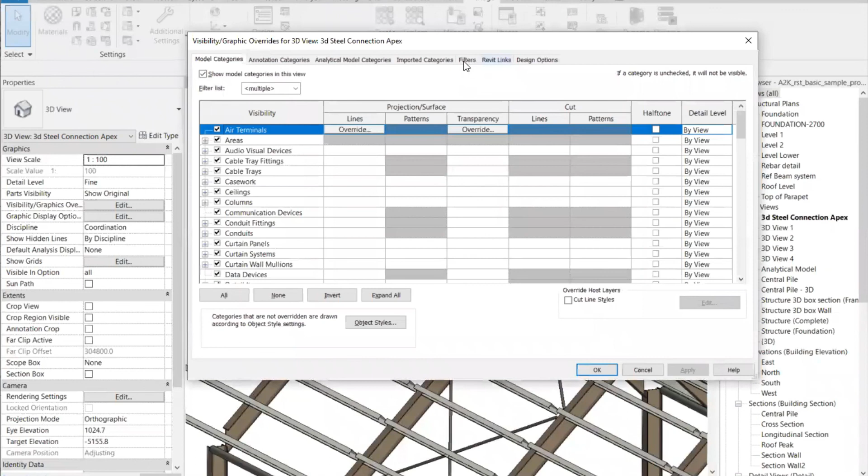I know I'm jumping around a bit and doing this quick, but you can see here I can now put in that 1980 filter. So it really gives you that ability to color the filters rather than just using the simple one over here, which is just your show all, etc.

I know you can create ones through there, but it gives you a lot more if you're doing a heap of stuff with phases. You can really change colors and things like that on different years. It gives you a lot more, especially if you're dealing with existing structures and historic documents. It's a feature people have been crying out for, and it gives a lot more flexibility.

I've got one question there. Is there any improvement with rebar diamond ties that aren't parallel to a face of concrete? That's quite specific, a good question. I'll take your name and try to get you an answer on that, probably not on the spur of the moment. I can't give you too much - it probably has improved, but I'd need to really look at that one. So I'll take a note of that. Apologies that I can't answer that on the fly.

For scheduling, what's the best way to separate concrete from steel? Currently when scheduling your steel beams, concrete ground beams are showing up, which you don't want. That's probably more of a workflow issue. You can filter your schedule lists, filter by material as well. So when you're producing a schedule, you can filter by material. That might be a good way to get around it. That's a filter I use a lot, just by the material.